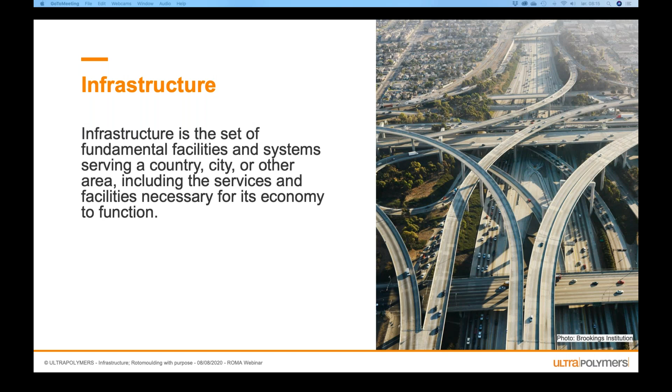In infrastructure, it's dominated by pipe extrusion, wire and cable, and rotomoulding. You can also see more injection molding and blow molding coming in, but those are the three main processing types to infrastructure.

These products made it possible for countries to distribute water, electricity, energy, sewage - the key elements for a society to survive. So before you enter rotomoulding and infrastructure, you will need to invest a lot and focus on quality and get full control over your process. These are some key elements that I will discuss in this webinar.

I've gathered some facts from Norway. In Norway, the quality of the water we distribute to each household is fantastic. You can drink it with no problems, you will get no illness, nothing. So tap water you can drink safely, even at public places in Norway.

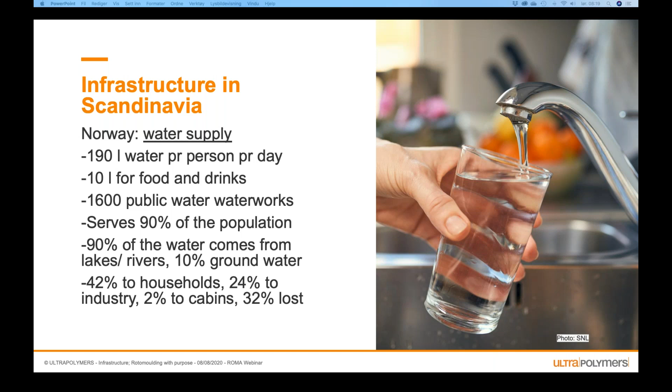When it comes to sewage, we have 2,500 public sewage treatment plants. You are not allowed to build a house without a sewage treatment system. And we plan to build 500 more. We have 350,000 small sewage treatment plants or septic tanks.

So if you multiply that with 250, that would be something like close to 100 million small sewage treatment plants and septic tanks in India, if you have a linear extrapolation.

And most of them are made of rotomolded polyethylene or glass fiber reinforced tanks.

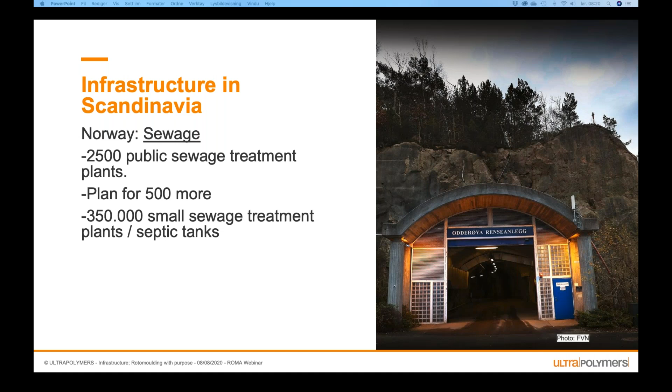The system is built up like this: you have a lake or a river, and you take water from this lake or river, you treat it so that it's safe to drink. Then you pump it into a pool. For instance, close to where I live, we have a big mountain, and in that mountain they have a pool where they store water for our municipality. Then it's pumped further to each household.

Out of the households, you have grey water and you have sewage water. So the sewage is then pumped, as much as possible only due to gravity, to the sewage treatment plant, but sometimes you need to pump it as well.

And you also have water from the streets that needs to go out of the streets, and that is also by gravity and pumps transported back to the cleaning station. From the cleaning station, all the water goes back into the rivers and the lakes or the ocean, and all that is solid is deponized, and then it can be used as fertilizers.

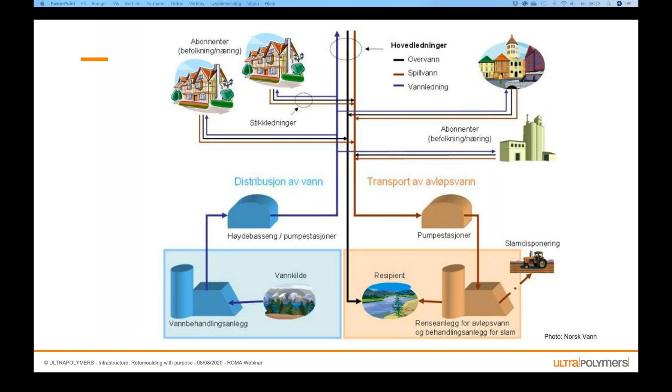It's impossible to talk about infrastructure without knowing about pipes. So I will go through pipes, tell you about the importance of pipes in infrastructure, and some of the legislations and standards that are used in pipe.

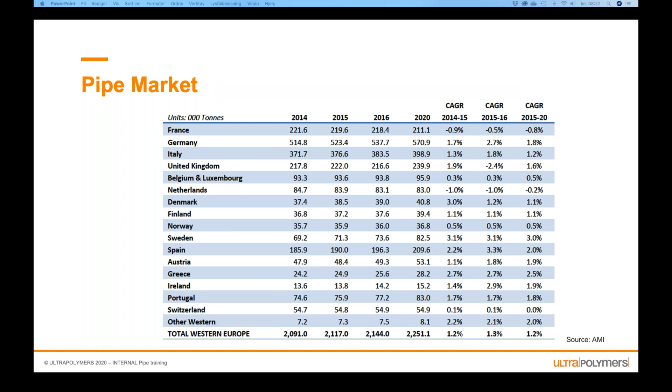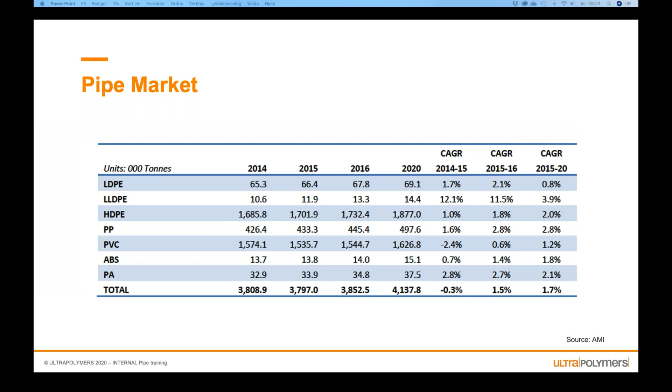In Europe, pipe is the third biggest segment, and a lot of material is sold into pipes - more than 2 million tons. The material used is dominated by polyethylene and PVC. Out of all these materials used in pipes, 70% is going to building and infrastructure. So the pipe guys are really focusing on infrastructure.

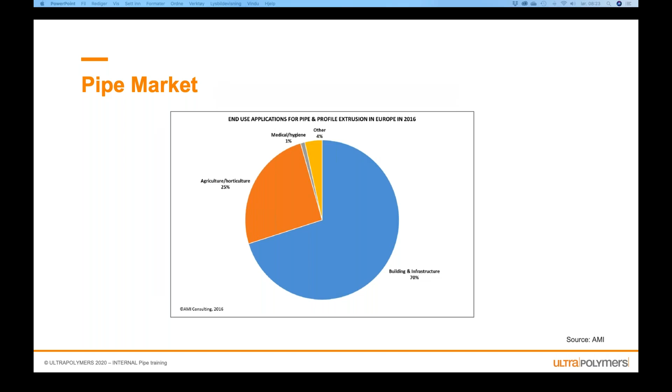So the pipes sector, you can say it's two different types of sectors, at least those two I will focus on today. It's gravity pipes, where you use gravity to move sewage in the pipes. That is the most inexpensive way to transport the sewage and also water from the streets. And this market is dominated by PVC. 60% is PVC, mainly due to high stiffness and cost.

The other one is, sorry, the other one is pressure pipes. And pressure pipes, that is water and gas distribution. To distribute tap water, so that when you open the tap in your kitchen and water comes out, you need to have pressure. And this is dominated by polyethylene.

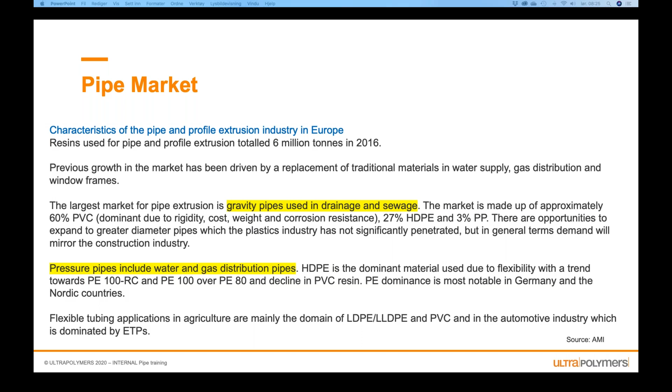In Scandinavia, we only use PE 100. No one is using PE 80 anymore. I will tell you a little bit about what PE 80 and PE 100 is. And the trend is going towards PE 100 RC. RC stands for resistant to cracks, crack resistant polyethylene 100. And especially in Germany and Scandinavia, it's PE 100 that is dominating.

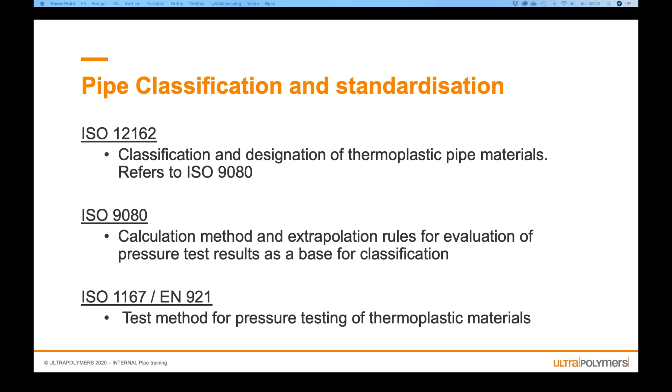So some of the standards used, and that we have to learn if we are entering infrastructure and dealing with pipes, are ISO 12162, ISO 9080, and ISO 1167. So I will go through these tests and some others now.

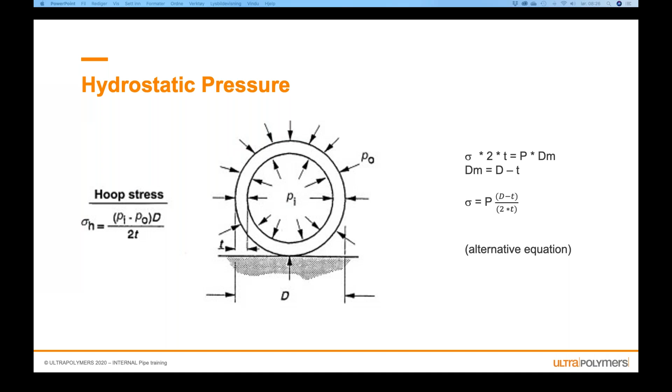That's an alternative equation. When you know the pressure inside, the pressure outside, the diameter of the pipe and the thickness of the pipe, then you can calculate the lifetime of the pipe. And you get a schematic creep curve for the pipe.

So what you want in pipe, as in rotomoulding, is ductile failure. So you measure the time and you do tests, and if you have a failure at the first part and the failure is ductile, then the failure is normally caused by a mistake during processing.

If you have a brittle failure between the mechanical knee and the chemical knee, then it could be that the pipe is processed wrong, or you have used up all the additives, or it could be a combination of failures. If you have a failure after the chemical knee, then it's mainly because you have no more additives left. The material has a stress crack or something like that.

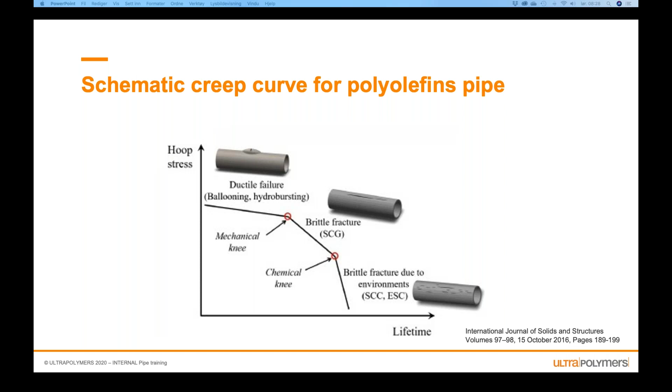So by doing this hoop stress test, creep rupture test, you get valuable information on how good the material you put into a pipe is. And then you can extrapolate how many years the pipe will survive when it's buried under the streets. You can use ISO 9080 to do this extrapolation.

Normally you want to test at high temperatures, normally 80 degrees and 65 degrees, because then the test doesn't take years to perform. And then you can extrapolate it to 20 degrees, which is the standard. In Scandinavia, when it's going 1 or 2 meters under the ground, you know that it's never ever going to be 20 degrees there.

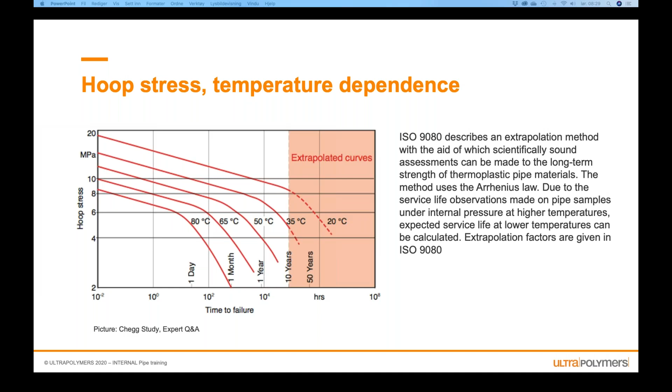By doing this, you see how long you have a ductile failure. Then you can classify your material into PE80, PE100, and PE125, which is the new standard coming up. So you go to 50 years lifetime and see what megapascal you are at when you have this brittle failure. You go 50 years into the curve, you should only have ductile failures here.

For PE80, you are at 8 megapascals or above. PE100, you are at 10 megapascals or above. And PE125, you are at 12.5 megapascals or above at the 50-year lifetime. So all pipes used in infrastructure in Norway should have a lifetime of at least 50 years. They want to have a lifetime of 100 years.

And this is very important for you that are doing rotomoulding and are entering infrastructure, because what is valid for pipe will be valid for rotomoulding. So in rotomoulding, you should not supply a product into infrastructure that is not guaranteed for at least 50 years underground without any failures,

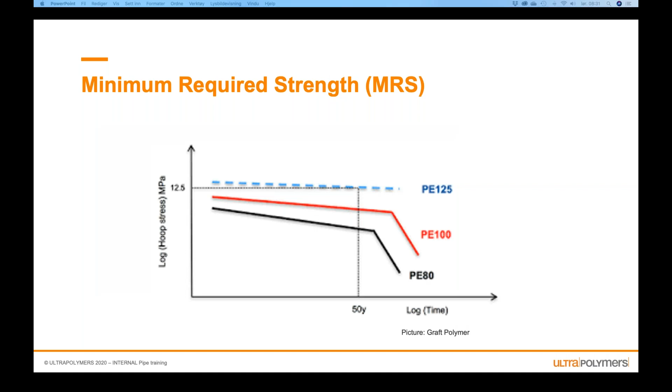For ISO 12162, you can see here you have the minimum required strength. This is what we talked about with the hoop curves. So if you have 8, you have a classification number of 80. That means you get a PE80.

But when you design your product, you use 6.3. That is the minimum required strength divided by 1.25. And the same if you have a PE100, you design the product with a stress of 8.

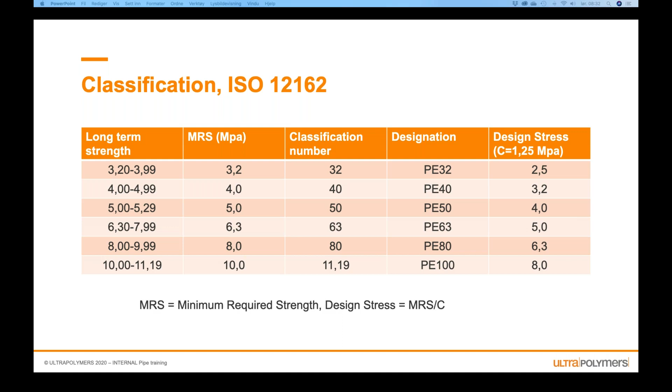In Norway now, they want to go to PE100 plus. That means that it's more than PE100, it's PE125. And they focus on creep rupture strength, and they say here 12 megapascals. And they want to have this RC grade, this slow crack growth. And you have to pass 500 hours at this test, and you have to have a resistance to crack propagation at 0 degrees, tested at about 10 bars.

So this is coming, and this is stuff that the pipe guys know about, and you have to work with the pipe guys, and they are often referring to these tests. And if you don't know their language, you're lost in a way. So you need to learn the pipe language to work in infrastructure.

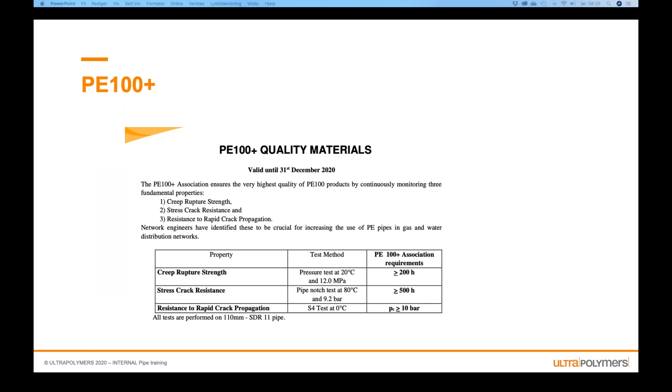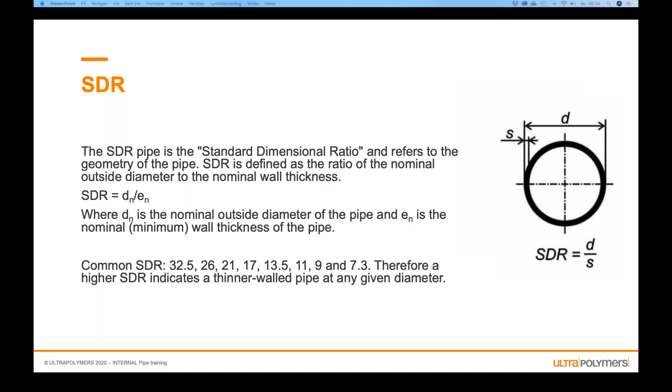That is some of the few standards in pipes. There are many more. So it depends on which kind of product you are entering. If you are entering gas distribution, if you want to enter non-pressure drainage, or if you want to have tap water, or if you want to have fittings, then you need to know these standards, at least in Europe.

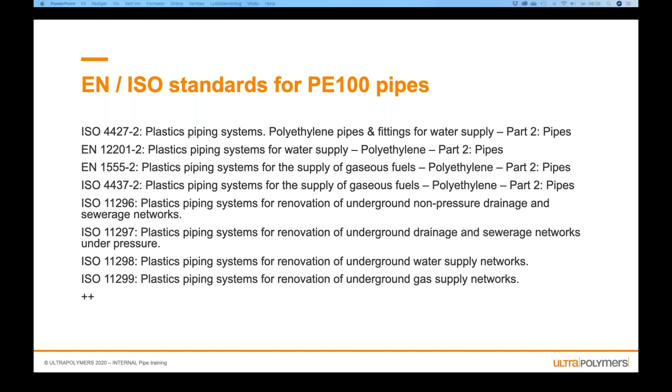Another term they use is MAOP, or often also called MOP. That is EN 12201. EN stands for European norm. And then you have the minimum required strength, and then here the different SDR types come in. And the MAOP is the maximum allowable operating pressure in bars.

So if you have a thin-walled pipe, a PE100, then you can have 6 bars. If you have a thicker-walled pipe, same material, same dimension, you can have 25 bars. So when you have a pipe, it's very easy to calculate. It's not that easy with rotational molding.

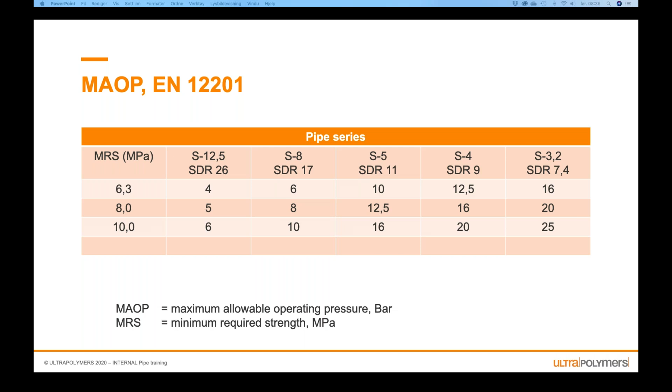So when you enter a website for a manufacturer of pipes, you will often see these kinds of schemes. So here you have the wall thickness and the diameter of the pipes. You have different types of materials: PE40, PE80, PE100. And it's very easy for those guys that are buying pipe to go in and see what they need.

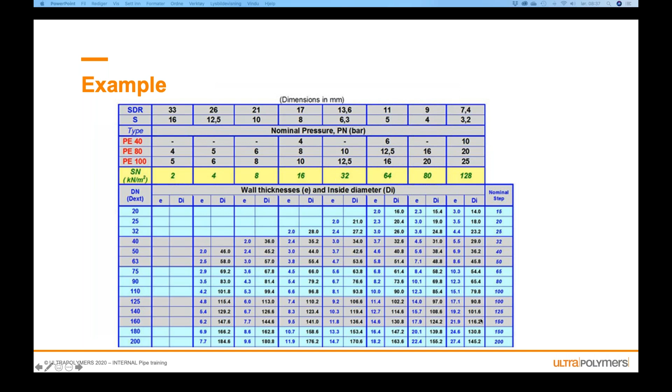For the materials of the pipe, there are a lot of specifications. You need specifications on the compound, on the color, on the carbon black, on the dispersion of the carbon black. Is it allowed to rework the material? Yes, in some cases, but then only from the same compound. You cannot go out and buy reground material and put it back into the pipe.

There is a limitation on the MFR. You need to have a certain OIT. You need to measure the slow crack growth and the resistance to rapid crack propagation. Will it affect the water quality? And of course, you need a hoop stress analysis.

And here are some different types of materials, which I often show. I will show it later also in this presentation, but it gives a good example that buying a black material, when you process it, you get a black pipe or a black rotomoulded product, but it's not necessarily good. What you want when you look at it in a microscope is an even distribution of the carbon black. And there are two ways that the carbon black or the carbon black masterbatch can ruin the material.

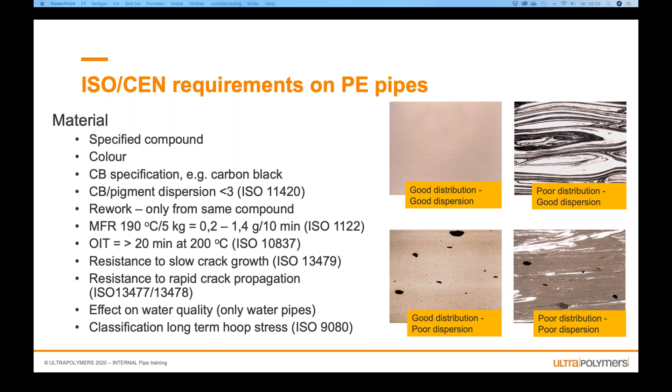But there is not only polyethylene used in pipes. There is also polypropylene, and in polypropylene you have three different types. You have a homopolymer. If you look at the drawing here, all red, that means it's only polypropylene. All the red dots are polypropylene. It's normally used in Scandinavia, at least, inside the buildings.

Because homopolymer of polypropylene has a very low impact strength. In Norway, we can have areas where in the winter it is -30 degrees, and if you are installing something underground at -30 and using a homopolymer, it will crack, definitely. Then you have a random polypropylene, where the polyethylene chains, the blue ones, are put in randomly. This is used for hot and cold water.

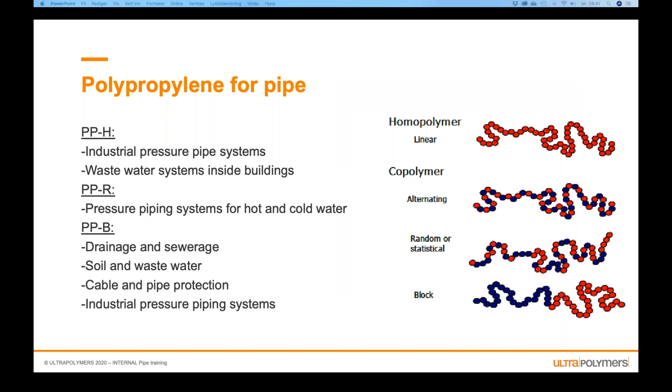And the last one is heterophasic block copolymer, or just block copolymer, where you have blocks of polyethylene in the polypropylene chain. This is used for drainage, sewage, soil and wastewater, cable, pipe protection, industrial pressure piping systems. So those installing the pipes can choose if they want to use polypropylene or polyethylene, and if it's hot water, normally they go with polypropylene.

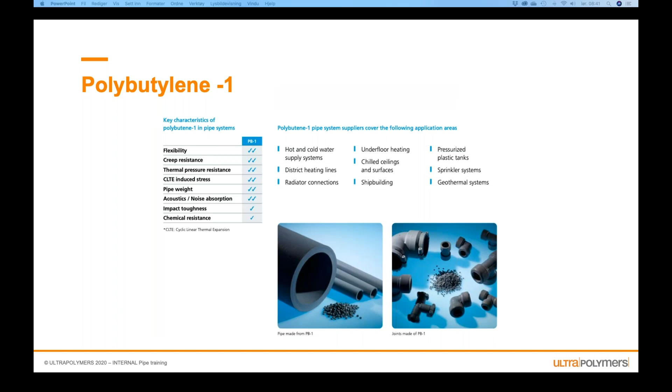But we also have polybutylene, which is a very, let's say, new family to the polyolefins, but it has some interesting characteristics that are appreciated in the pipe industry. Some of the applications in pipe are hot and cold water pipe, sewage pipe, gas pipes, steel pipe coating, industrial, rotational molding, jointing technique. I will take out rotational molding here, and we'll go deeper into it later in this webinar.

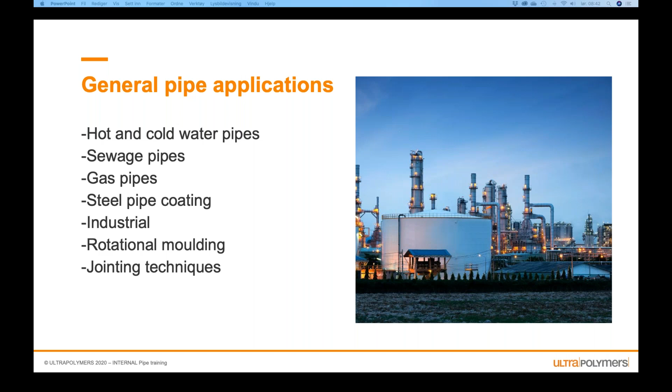For hot and cold water pipes in Scandinavia, it used to be all brass, but now it's changing to more and more polyolefins. You use polyethylene and polypropylene in pressure pipes. Normally random polypropylene in radiator connections. Polypropylene or cross-linked polyethylene or polybutylene in floor heating and wall heating. You have to notice that you cannot use homopolymer in this application. For cooling water, or cold water, we often use polypropylene, cross-linked polyethylene, and polybutylene.

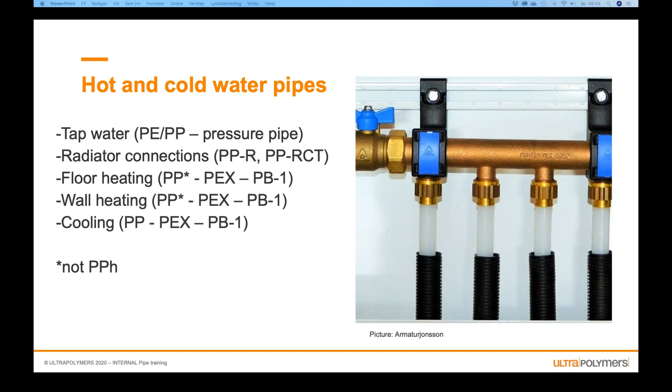It will leak from this PEX pipe into the polyethylene pipe, and then go to a central point where you have drainage. Then you can see that, okay, now I have a leakage on pipe number 4, and you can close this pipe and replace it. Then you will not have any water damage in your house.

Also a bit about crosslinking. Why use crosslinked material? It has improved heat deformation resistance, improved stress crack resistance, improved pressure resistance at very high temperature, improved creep resistance, and improved impact resistance. What you should know about cross-linked polyethylene is that it's not mechanically recyclable. It might be that we can chemically recycle it in the future, but that's a bit ahead, but hopefully we can manage that.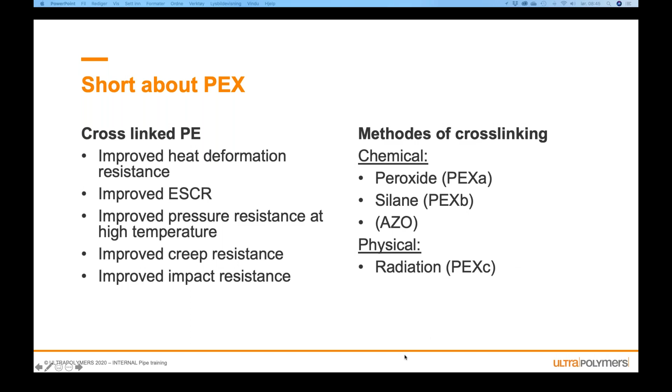So how do you get a cross-linked pipe? You take a normal polyethylene, and most common is to use peroxides in the extruder to cross-link it, or you can use silane. Then you need to wait a bit before the cross-linking takes place, because silane needs water, which it takes normally from the humidity in the air. Or you can radiate it. So PEX A is peroxide, PEX B is silane, PEX C is radiation. Some call the AZO technique PEX C and the radiation PEX B, but that's just a small comment.

For underground sewage and drainage, for smaller diameters, well, smaller and smaller, the largest I've seen so far is 1200 millimeter, polypropylene block copolymer is increasing. It's still dominated by polyethylene, but polypropylene block copolymer is increasing. PVC is very often used, but for larger diameters, PE100, PE100 RC, and PE100 XL. PE100 RC has the hoop stress of 10 megapascal, still 10 megapascal, but it's a stress crack resistant material.

XL is for when you make a 2.5 meter diameter continuously extruded pipe. Using a PE80 or normal PE100, you can have some sagging on the top, because the weight of the material when it's hot will move and make it oval. So they have developed this XL grade, which is a low sagging material.

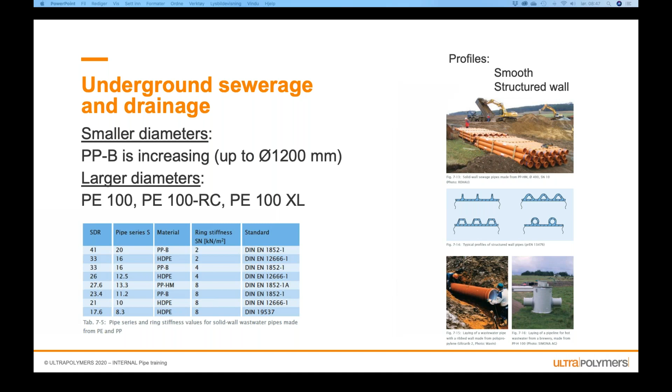For gas distribution, it's mainly PE100. It's leak-free, with a good record even during earthquakes, no corrosion, lightweight, flexible, and high toughness. So in the UK, there's a big distribution network of gas pipes. In Scandinavia, you can hardly see it. In Scandinavia, we use mainly electricity for heating.

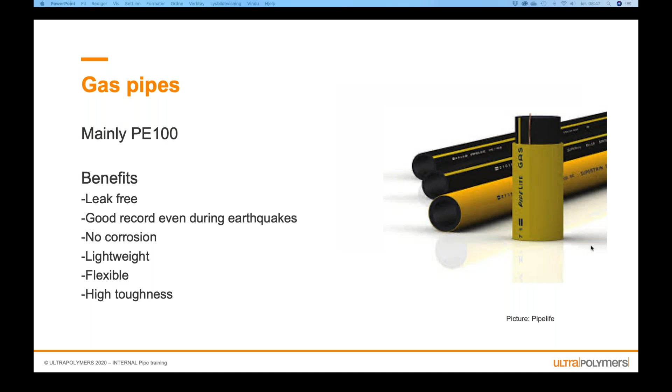A big industry in Norway is steel pipe coating. We have a steel pipe, and then you coat it with polyethylene. The reason for that is that polyethylene has fantastic corrosion resistance. So when you pump oil or gas from the North Sea to land, they use steel pipe, but due to the corrosion, they have to coat it with polyethylene.

The steel pipe has fantastic mechanical properties, but it's even better now when they coat it with polyethylene. So it's good chemical resistance outside the pipe, and against UV radiation during storage.

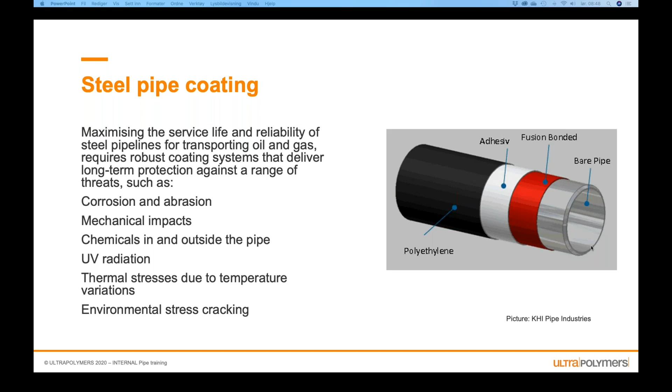We are installing retention basins. Here is an example of spun pipes that are welded at the end, which can store enormous amounts of water. Because in Scandinavia, we get more and more water per time, not like the monsoons that you have, but when it rains a lot, the pipes that we have for taking the water out of the streets are too small. Therefore, we need a kind of retention basin to store the water so the pipes that we have are not overloaded.

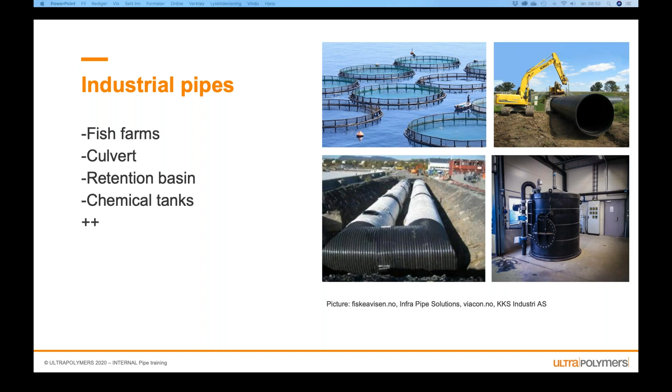Some about the jointing techniques. In pipes, they use gaskets, shrink fit, push fit, press fit, and welding. So if you look at the upper right, you have a gasket inside the pipe, and then you just push the next pipe into it, and then it's leak-free. Here you have a press shrink fit, so you push the pipes into a connector, and then you have a device that you screw on, so that you shrink the pipe onto the device that is made of copper. And then you have press fit, push fit and welding.

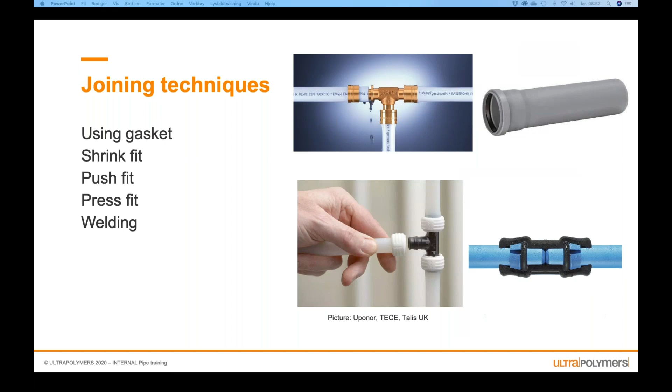And I will go a bit deeper into welding, because welding is also important to know about. If you're going into infrastructure, you need to have a welding department. Only thermoplastics are weldable, and they are only weldable with similar materials. It is possible to weld a pipe onto polyethylene, but it's not possible to weld a polypropylene pipe onto a polyethylene rotomoulded product.

And it's very strict when you are welding pipes. You need to control the dimension, method, time, pressure, temperature, and that has to be logged. And if the municipality wants to know about the log, you are obliged to give it to them.

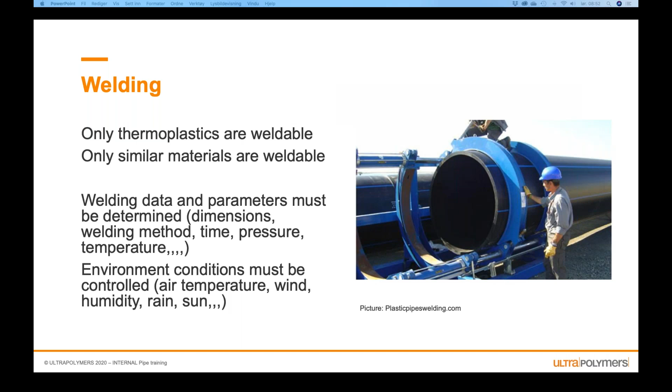So if you're doing butt welding, then you have a pipe fixed, both ends are fixed. You have a mechanical device that takes these two pipes apart. Then you have what we call a mirror, which is heated up to, I'm not sure, but around 200 degrees. It's placed between those two pipes, and the device is then pushing it together with a certain pressure,

holding it there for a certain time, opening it again, removing the mirror, and moving the two pipes together and pressing them together for a certain time with a certain pressure, and then it's welded. And by doing it in this controlled way, you have a weld that in mechanical strength is as good as, or 99% as good as, pure extrusion, if you have done it correctly.

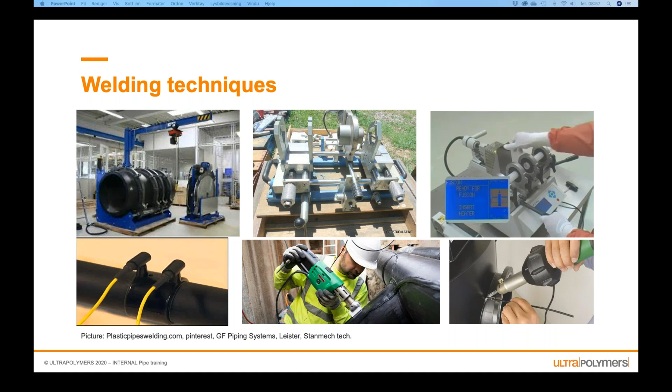So if you go back to rotomolding, polyethylene is dominating in rotomolding, as you know. According to Paul Nugent, it's more than 85% in the world that are using polyethylene. There is still some PVC production, but not so much. He says that the global volume is 1,800 kilotons, but I think we can double or triple that number at least. In Europe, it's approximately 275 kilotons going into rotomoulding, and it's mainly polyethylene. The polyethylene number in Europe is probably more like 95.

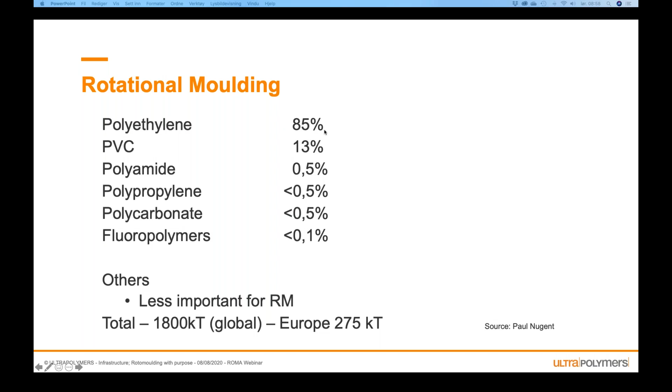If you look at Scandinavia for rotomoulding, 40% of what we produce is for infrastructure. So every pipe manufacturer in Scandinavia, the big ones like Uponor, Pipelife, Wavin, all of them, they have their own rotomoulding department. And that is often not enough. So they have partnerships with selected rotomolders to produce some of the products for them.

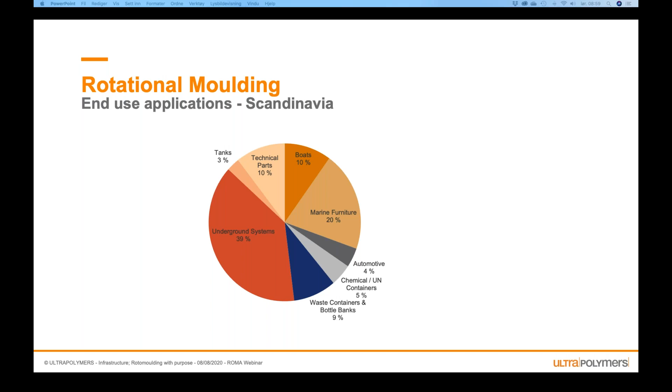And the smaller pipe producers have a partnership with a rotomolder to make the rotomolding products for them, so they can focus on pipe, and their selected partner focuses on rotomolding. So this is how it works in Scandinavia, and we are highly focused on infrastructure. So if you go into some of the products that are used in infrastructure for rotomoulding, it is, I would say, manholes and inspection chambers.

And for these products, we have to comply with a standard called EN 13598. And you have two versions. You have version 1, which is for shallow inspection chambers, and version 2, that is for manholes and inspection chambers in traffic areas, or if they are deep underground installations. If they go down 3 meters, you have to go with 2. If they go down 1 meter into the ground, or 1.5 meters, you have to follow number 1.

And so I call them sewage flow directors. That is what we normally call manholes. But it's not only manholes as sewage flow directors that have to follow these standards. It's also pump stations, inspection chambers, drinking water manifolds, rainwater collection systems, and cable ducts.

And in this test, you have to have structural integrity. That is normally a vacuum test, because if you have a pump station or a manhole, you don't want the bottom of the tank to bulge. You want to keep it stable.

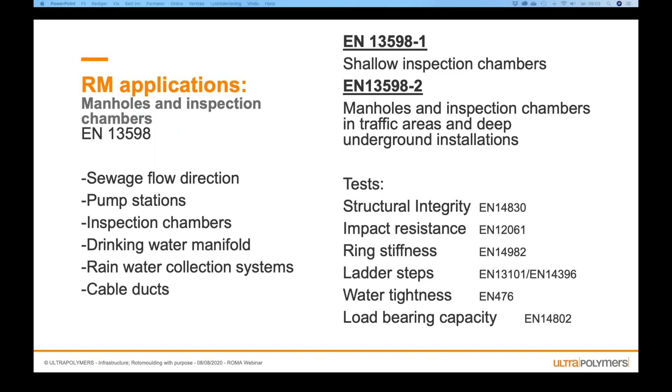So you need a certain minimum ring stiffness. We often have ladders in these tanks for entering and inspection, so the ladders have to be secure and safe to use. And of course it needs to be watertight. If it's in a trafficked area and a truck drives over it, it should not collapse, so you need a load bearing capacity. All these are covered in EN 13598, and you have to pass it. It's quite a tough test regime to get an approved manhole in rotomoulding.

And here are some of the manholes. Normally it's 3 different products. You have a base like this - here, for instance, you have 3 pipes coming in, and the rotomolded product joins those 3 streams into 1 stream going out. Or you can have just 1 stream going through, which is only for inspection. Or you can have 2 coming in, or 5 coming in and 1 out. So there's a lot of different opportunities in rotomolding.

So you need to have many molds. What you can do is have this as 1 mold, and if you want to rotomold the whole manhole as one piece, you can just shift the base of the mold. Or you can mold this alone and then assemble it together either by welding or by using gaskets and clips, so that you can keep many molds in the warehouse, and just clip on the right middle section, and clip it onto the riser.

The tendency in manholes is that they're going to be bigger and bigger in diameter, especially for those you are going to enter. So in Scandinavia you have to have a 1,000 millimeter, or 1 meter, diameter. I like to say that's because the persons entering are getting fatter and fatter, but that's not true - it's something about safety and health. So it's getting bigger and bigger.

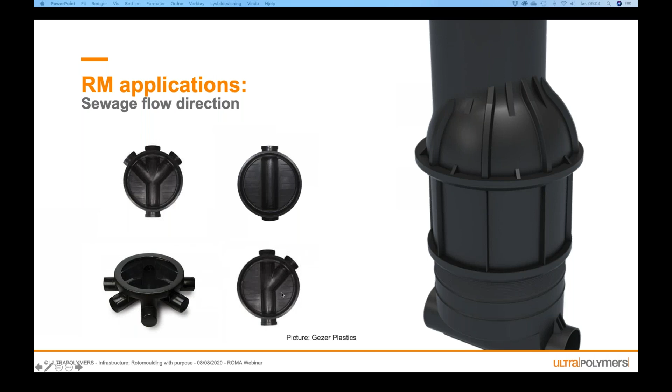For manholes, there is an expert who has also been in India many times. His name is Miki Burmil. He has run factories producing manholes for a lifetime, I would say. He's now a consultant, and you can contact him at mikiburmil.com. He does all the engineering and the design, and assists you in making manholes that will last a long time. He has done a calculation showing that rotomoulding is very efficient when producing manholes if you assemble them afterwards.

That means if you produce the base, the midsection, and the riser separately, and then later weld or clip them together, he says you can produce 1 product in just over 3 minutes. How he calculated that: if you have a nominal wall thickness of 10 to 12 millimeters, average weight of the product is 25 kilograms, average oven time is 25 minutes, and you have 8 products on the spider - 4 products on each side of a straight arm.

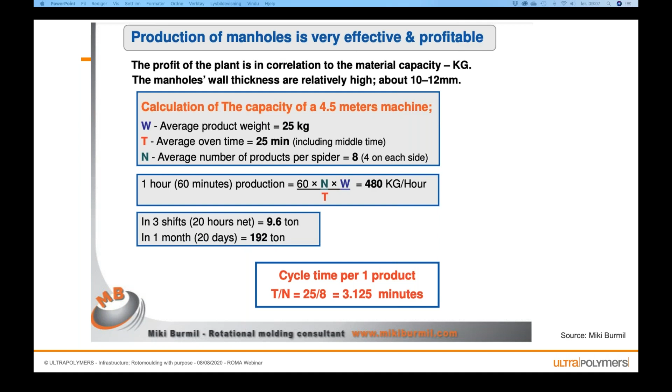All right, that was manholes. This is pump stations - also very useful or needed in infrastructure, because you need to pump in some areas. You cannot only rely on gravity. If you are in a hilly area, you have to pump the sewage from sea level up to perhaps 50 meters, and then let gravity take it down to sea level again, and up 50 meters - yeah, you know what I mean.

In this pump station, normally you have different types of sensors saying that, okay, now the tank is empty, now you can shut off the pump. Now it's 20% filled, perhaps we should start to pump on low energy. And then when it's 50% filled, you go on higher energy on the pump, and when it's full, you go on full speed.

But what's also worth mentioning is that there are several different types of pumps. At least in India, I would guess you have 50 to 100 different suppliers of pumps, and all of them are fastened differently. There is no uniform way to fasten the pump into the tank, so you need a kind of flexible system.

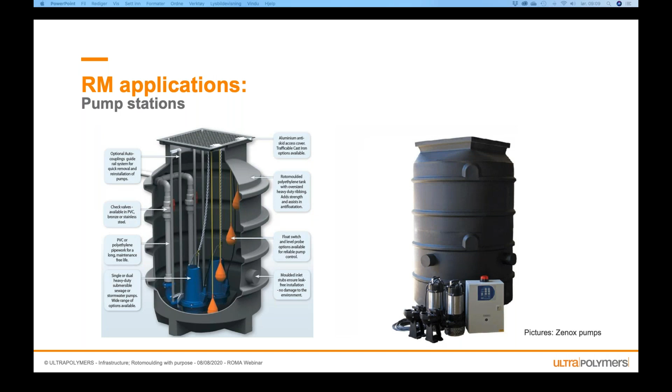If you have any leakages, you have to dig a hole, get it out, fix it, and place it back, and it's very costly. It's normally the rotomolder or the entrepreneur that has to cover these costs.

With this system, they also have a pipe-in-a-pipe system, so you have one pipe going into the house covered by another pipe. So if you had a leakage, it would come back to this tank, and you could see which of these pipes were leaking.

You could also install a water meter here, so you can see how much water each household is consuming. In Norway, that is free - you don't have to pay whether you use 1 liter or 1 billion liters, you pay the same. You only pay for distribution, not for the amount.

But in the future, water will be a rare resource and you'll have to pay for what you use. So by easily installing a water meter here, which reports back to the municipality how much someone is using, the municipality can then invoice them by usage.

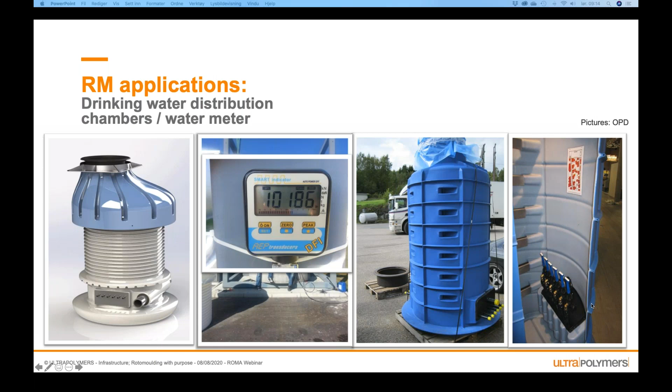Rainwater distribution chambers - you can see these under the streets all over the world. You need to get rid of the rainwater, and that's normally going into a tank, which is then distributing it into a pipe.

In Norway, as I said, we have got more and more rain per time, and that means that all our pipes for rainwater are actually too small. So we need to install retention basins too. This is also very similar to a normal manhole, but just with a different base.

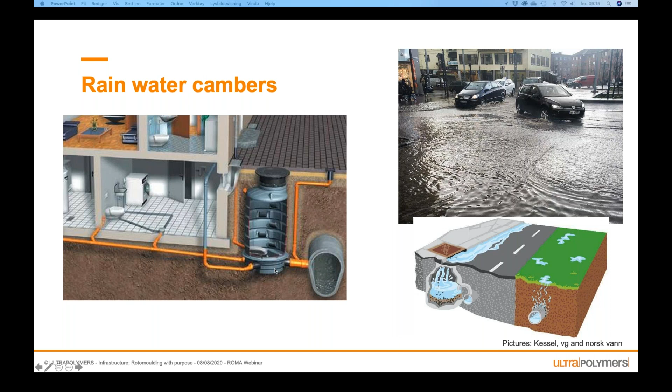And then you have all kinds of different cable ducts. I think in Norway we still have most of the electricity in the air, but there is an ongoing discussion to move it from the air to the ground. All internet cables, TV cables, all that kind of stuff are going into the ground. I'm sure that will also be a trend all over the world, to get all the electricity from air to ground, and then you need cable ducts. The most important thing with cable ducts is to keep them watertight, and that is not a problem with rotomoulding. So rotomoulding, cable ducts - perfect match.

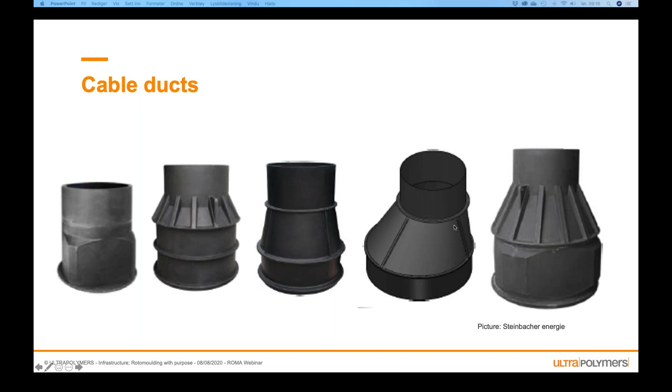All right, that was manholes and inspection chambers. Some other products - septic tanks. For septic tanks, it's EN 12566/1. That's the norm we have to fulfill to be able to get a CE marking and be allowed to sell it in Europe.

The most important criteria for septic tanks are as I mentioned here: you have to measure the overall dimensions, accessibility, water tightness, volume, structural behavior, and hydraulic efficiency. The hydraulic efficiency has actually not so much to do with the polyethylene itself - it's how fast you can separate water and feces.

So here you have in this tank, 3 chambers. Sewage is coming in, and then through a hole it's going to the next one, and then you have a lot of solids in this chamber. Water is going in here with some solid, and then the next one goes into the third chamber, which is purely or mostly liquid. And then this is either pumped into another tank that treats the liquid even further, or it's being pumped into a tank that takes it to a big sewage treatment plant.

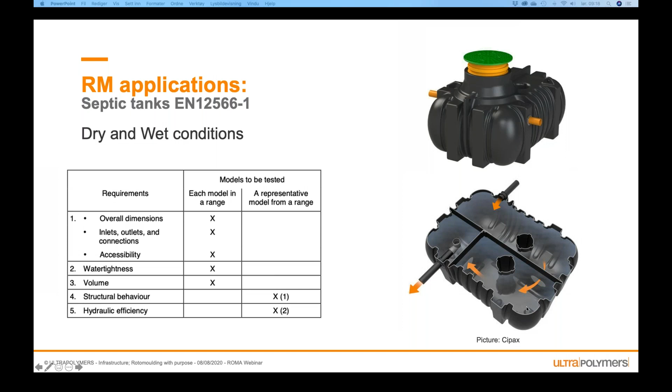Then you have the sewage treatment plants. That is also 12566, but it's number 3. Additional to all these tests you have to do with septic tanks, which you also have to do with sewage treatment plants, you have to secure the efficiency of the treatment.

So, for instance, you have to remove more than 90% of the phosphoric compounds, and also BOD - 90% has to be removed - and that's a special tank. Then, if that is okay, you can take it into the ground, or into the river, or into the sea. It's so pure that it's allowed to be put back into nature.

In addition, this is a schematic test of how the pit test is done, and the pit test is very well known in Europe for everything that goes into infrastructure. So you have a chamber, you place the tank in the chamber, and you fill it with a certain type of gravel. It's specified in detail how you should fill it.

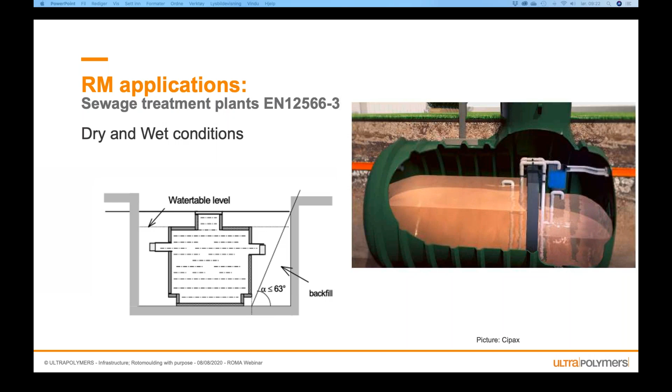Yeah, so he's very successful in making sewage treatment plants. As I told you, 350,000 sold in Norway only, 5 million people. It's a strong competition between the glass fiber reinforced tanks and rotomolded tanks, but I think rotomolding has so much more potential of dominating this sector due to the flexibility of the rotomolding process and the welding of a pipe into a tank and make it 100% waterproof compared to glass fiber reinforced tanks.

So there are also a lot of different methods of how to chemically, biologically, mechanically treat the water to improve it. So I think this is a great opportunity for the rotomoulding business in India to look at.

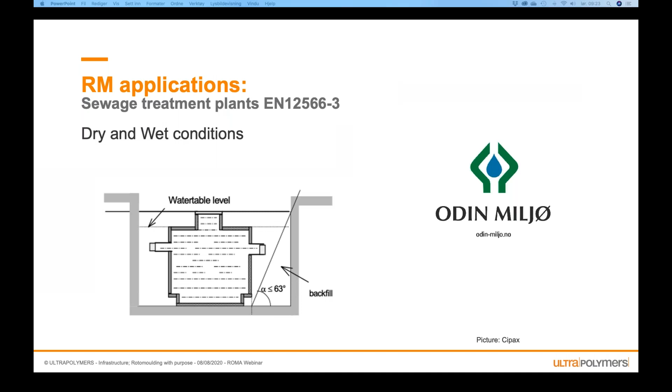Oh yeah, no, sorry, I will not show that again. Next one. Sorry about the text here, but another one also here is oil and grease separators. And for oil and grease separators, as well as for septic tanks, and as well for sewage treatment plants, there is also a material criteria. So you need to have an MFR around 4, higher than 930 density, and you need to check the tensile properties. It's normally stated on the data sheets of your supplier, so it should be no trick to find a material that is suited.

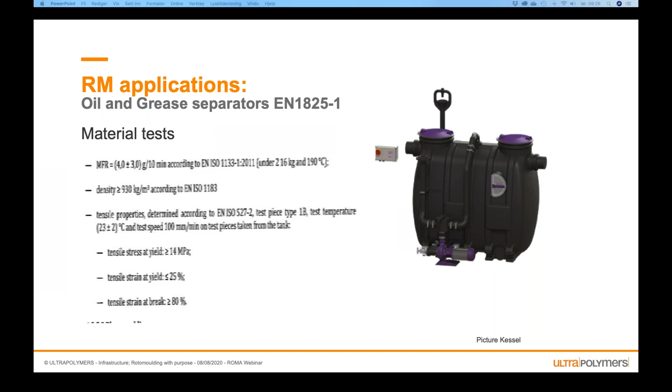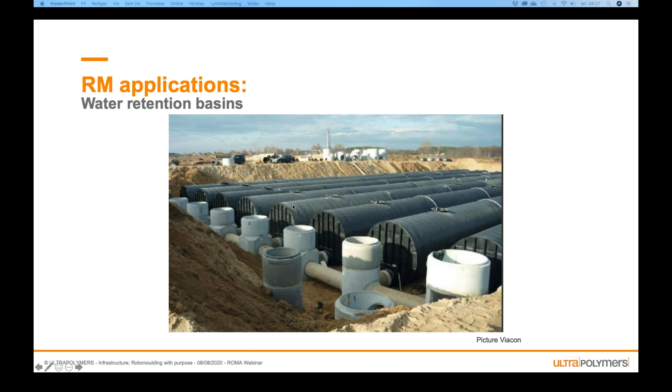Yeah, we have discussed water retention basins a lot. This can be pipes, as you see here, but more clever designs are to make these here rotomoldable instead of concrete. So you have a rotomoldable base that is connecting 2 of the pipes, or all the pipes, so that it's very easy for the water to flow in all the chambers, and this is very good to place, for instance, under a parking spot. So if you're making a parking spot in the city, why don't you put a retention basin under it? It's covered, and it will help during heavy rain.

Then you have a lot of smaller devices. This is a pumping station for cottages. So you just have a small septic tank of 80 to 100 liters, with the same sensors as the big one, but this is pumping the sewage from your cottage to the main sewage line that is going to the main sewage treatment plants. Very easy to install and very flexible and reliable system.

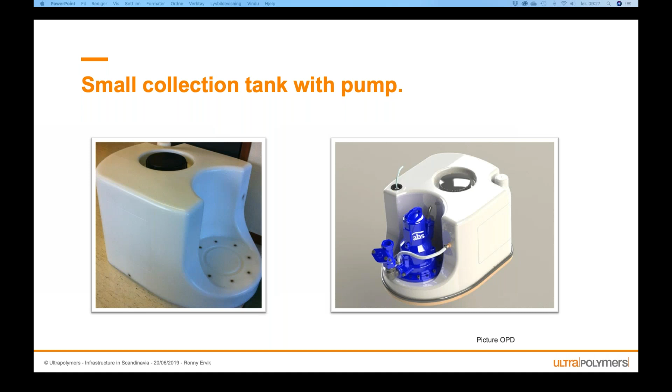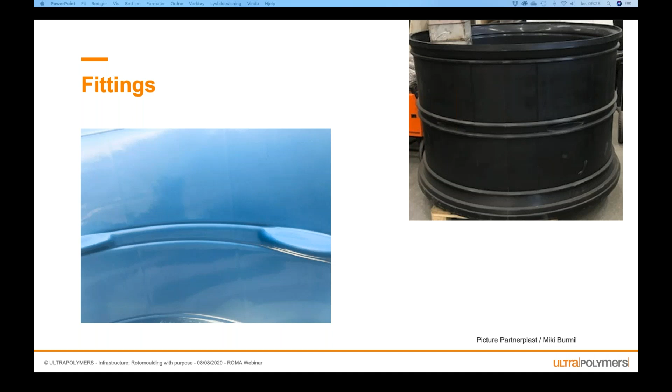You have fittings. This is a polypropylene fitting, which is 1 meter in diameter, made by Partnerplast for Pipelife, so that they can connect the big polypropylene pipes to each other. The smaller fittings are normally injection molded in Scandinavia. Up to 300-400 millimeter in diameter is normally injection molded, and the size is increasing by injection molding. But it used to be in the past all rotomoulding. For the bigger dimensions, rotomoulding is much more efficient and cost efficient than injection molding.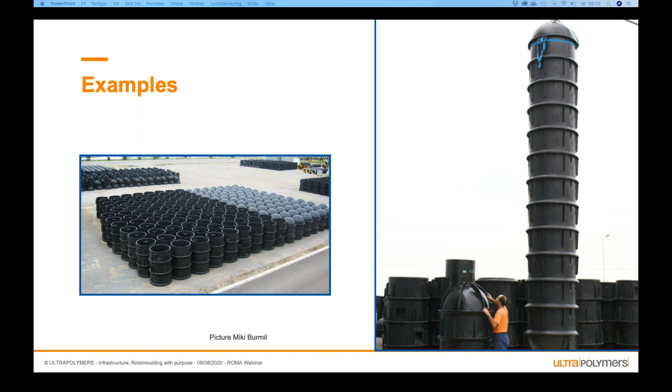You can also bring all these parts to the construction area and weld or connect them on site. So it's very flexible also from a logistics point of view. Some other examples are the drainage tank. Here is a speed reducer tank. So if you are moving sewage from a hill downward, to reduce the speed of the flow, you can install these manholes in the hillside.

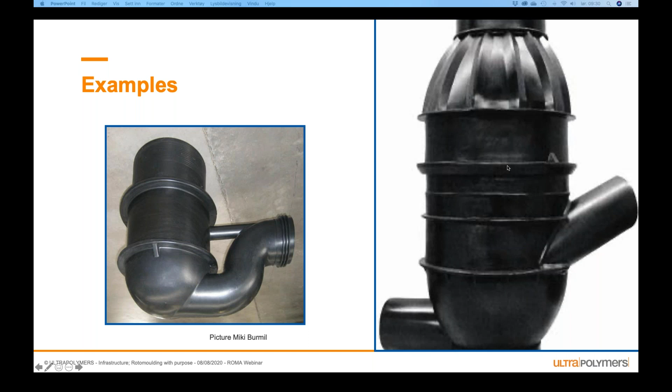So it's a lot of different examples, and here is a very good example of why you need a welding department in your rotomoulding site, because there are many one-offs. That means that here we have a problem. We need a tank or a manhole that looks like this. We have 3 pipes coming in at 1 meter height and one coming in at 1.5 meter height, and it's all going out at 2 meter height. So please, can you supply this?

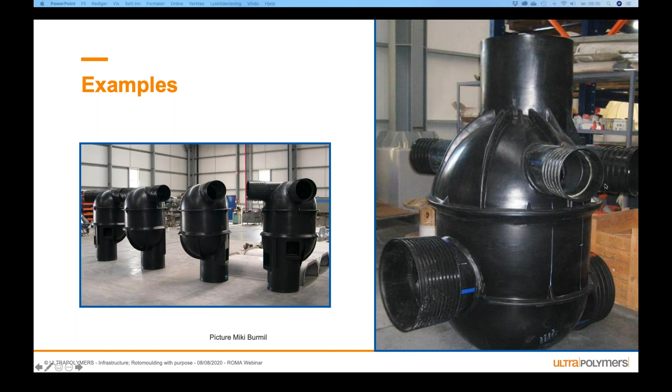And then you can say yes, because if you have a welding department, you can take a standard rotomoulding manhole, cut and weld it in, and then sell it as it is. And yeah, you can put the rotomoulding part directly on a pipe like this. So you have all the possibilities in the world when you are working with pipe and rotomoulding, and you have your own welding department to supply the customer exactly what he needs.

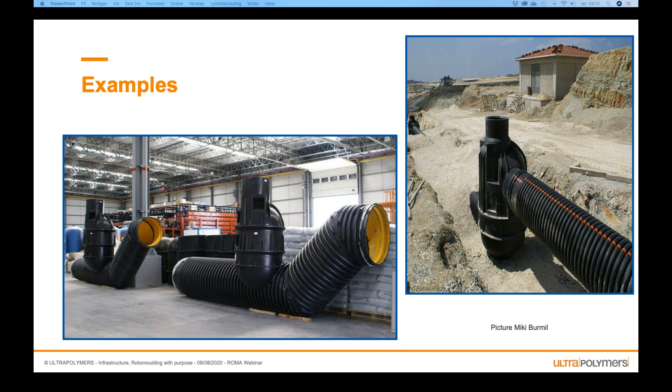All right, so now I'm starting to finalize. So how can you be a success in infrastructure? Well, it needs a lot of focus, attention, and support from the government. But the government will not move until you have a plastic organization that is really active and pushing for standardization, for allowing polyethylene or plastics to be used. You need to convince the region and the municipalities to move away from steel or concrete or what they're using and sell the benefits of polyethylene.

You need to guarantee them 25 to 50 years lifetime and show the benefits of installing a high quality system, how that will help them save costs. You have to work with the test houses so that the test houses are accredited to perform the tests that you need in rotomoulding. You have to work with the material suppliers to make sure that they are supplying materials that are covering your needs.

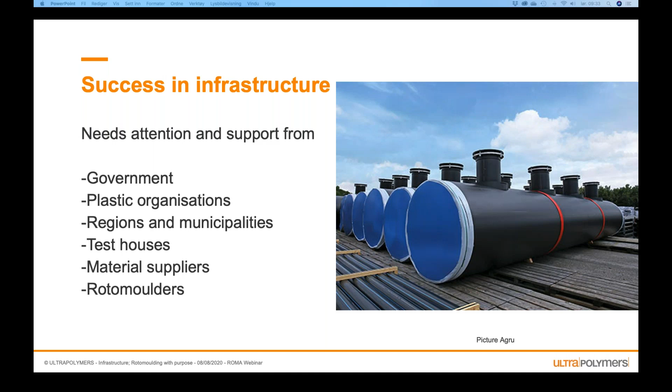And you, as a rotomoulder, you need to focus on quality in all your sections, not only on the machine and the molds and the operators. In the entire organization, you need to have a quality department, you need to have a design department, you need to work with the test houses, and you need to make sure that the products leaving your factory are really suited to last for 25 years plus.

So for the standardizations, I think ROMA should be active and one of the drivers for setting the standards. I'm not sure how many standards you have for rotomolded products and infrastructure in India, but you need to have high quality standards, making sure that there are no rotomolders coming in and just selling on price and with low quality. Because if the product fails, the municipality, the government, the regions will say, oh, we will ban rotomolding because it fails after 2 years, and it's so costly for us to use rotomolded products.

So you need to make sure that the only people allowed into this sector are high quality rotomolders with a quality-minded mindset. And you should involve pipe manufacturers in making the standards, because they are used to standards, and by working together with the pipe manufacturer, they get confidence that you are doing the right thing, and that they can easily recommend to their customers that with a plastic pipe you should have a plastic manhole or a plastic pump chamber or plastic sewage treatment plants or whatever.

And you should also implement yearly audits of the rotomolders and reapproval of the material and tanks every 5 years, because in Europe we have seen the same in the startup. There were a lot of people starting up with rotomolding infrastructure tanks, and for the test they used a high quality material, and for the production they used the cheapest material they could find.

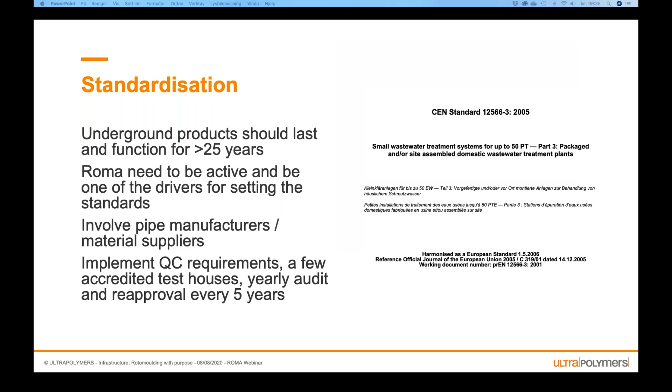And I would say that you need to focus as a material supplier. You need to be better and better and better. I tested a lot of different materials, and to be a bit frank, all the materials I've tested from India will not pass the strict infrastructure testing regime. I think that you need to focus on the homogeneity of the material. I'm now working with a European supplier that is struggling to get the homogeneity of the material 100%.

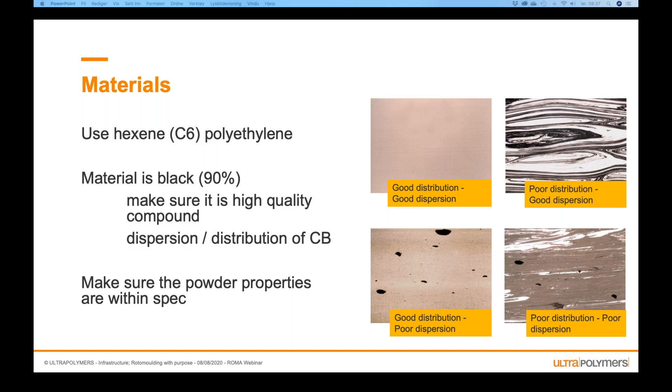For the rotomolder, if you're not 100% committed to do it in a high quality manner, to produce the manholes, the pump chambers, the septic tanks in high quality, do something else. Because this requires a great focus from you. You have a huge startup cost. You have to buy 50 molds if you're going into manholes. You need to work with a designer to get the test cost down. You should do finite element analysis so that you don't have to test 3 times before you get an approved tank.

You need to work with a test house. You need to obtain a certificate. You need to buy molds. You need to know how to weld. Maybe you need to train welders as well. You have audits and you have quality controls. So don't start with it if you are not 100% committed. But if you do, you can make good money and you can help your country developing a fantastic infrastructure system.

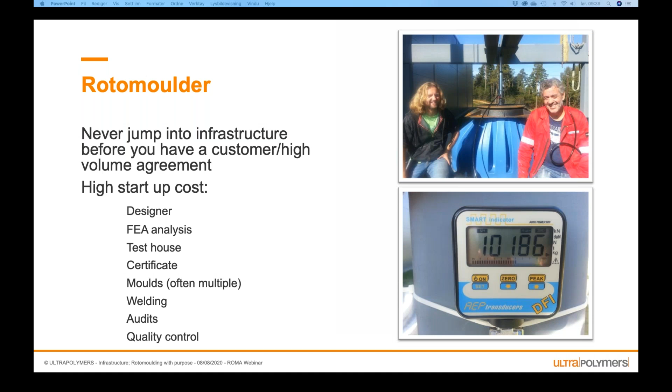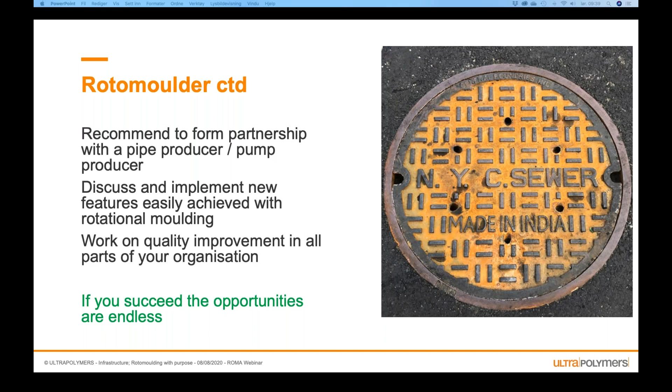So I hope that many of you really go into this sector, and I hope that all of you that go in are really 100% successful. So maybe in the future, when you are making rotomoulding products, you are having a partnership with a pipe producer or pump producer, and you are implementing high quality control, and you're making the best manholes or septic tanks in the world, then you have opportunities that are endless. And maybe we see in New York a manhole that says made in India. Thank you very much.

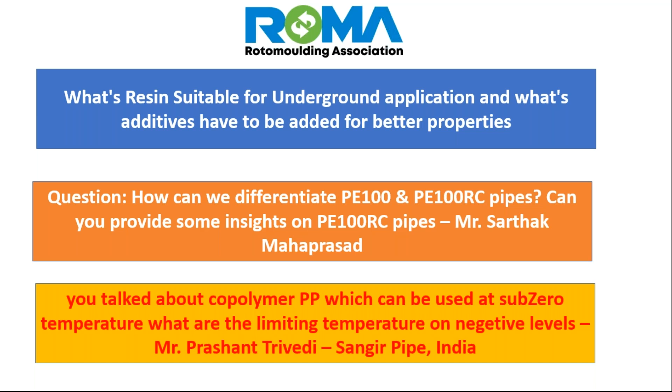Thanks. Next question is from our members, Roma is asking, can you arrange a copy of EN standards like 13598, 12566 for making Indian standards? I cannot send you these standards. In Europe, you have to go on the web and pay money and download it, and you can do that from India as well. So all of these are easily accessible on the website, and if you take those standards as a base for your standards and then modify it, take out what is not needed in India and put in what other concerns you have, it's a great base for standards.

You should try to really put in all details which this standard is valid for. In Europe, it's very vaguely defined, but you should put in sewage treatment systems. You should put in this is for septic tanks. You should put in this is for all kinds of manholes. You should make it easy for the rotomolder to understand which standard he has to follow. That could be a mess in Europe sometimes.

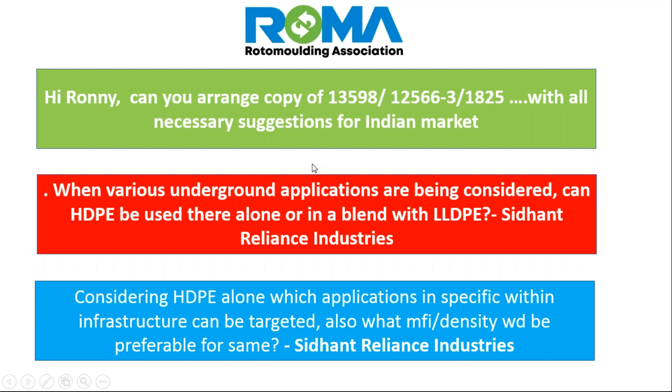Yeah, sir. So continuing on the same question, what kind of molecular weight distribution is preferred for this kind of applications, wherein say a broader MWD would be more preferable, or a narrower when you are considering 30,000 liter tanks? Specifically, I'm asking for underground tanks, wherein we are seeking certain applications like biodiesel tanks, which are made up to 30,000 liters as well.

Well, in rotomoulding, you need a narrow molecular weight distribution. If you have a very broad molecular weight distribution, as you have in pipes or blow molding and things like that, then to melt everything, also the very big long chains, the smaller one will degrade and burn before you make a product. So in rotomoulding, preference is to have as narrow as possible, weight possible, everything goes fast. Rotomoulding goes fast, so you save energy, you save cycle time, and so on.

What I'm working with now is a kind of a smart company that is making narrow molecular weight distribution with a small shoulder, because the long chains that you have in pipe, they give extra strength and durability to the material, and ideally we should have that in rotomoulding as well, but then it makes it very difficult to process.